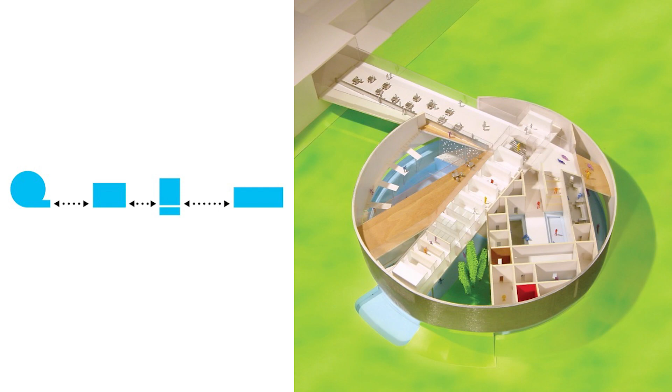It was a public bath, and it was unexpected. When the clients came to the office, there was only Bjarke and Julien De Smedt, so that morning before the meeting he felt he needed to drum up some colleagues to make it sound like we were an office. So they came, and we had 4 people sitting around a desk. Then for some reason Bjarke had to leave, and the client asked the other guy at the table, who needed to go to the restroom, whether he knew where it was, and he didn't, because he'd never worked in the office. So they found out, but they were gracious, and in the end the project died. But we have a good relationship with this client to this day.

The first real project that was built was the Maritime Youth House, which came from a competition.

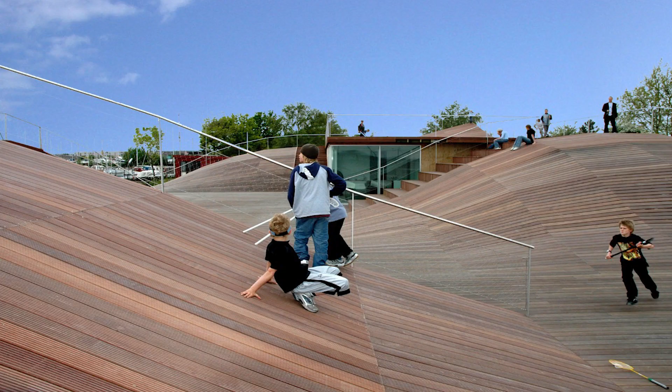They gave us a project with a budget, and essentially a third of the budget was to remediate the soil. We felt that once we start to use that money to dig out soil and put back better soil, we'd sit down with engineers and come up with a solution. So rather than digging it out, we kept it and put over the entire soil that top layer of wooden structure with steel. Therefore we were able to provide the public a space for them to use, and the building still had enough money for us to actually build it.

It's still to this day used quite heavily by young people of all ages, and with it there is a canoe storage facility attached.

Soon after, we got invited to do another project in the Copenhagen harbor. We extended the park, which is on the bottom, and introduced a series of public baths of different scales and functions, creating a public space over the harbor where up until that day nothing was there.

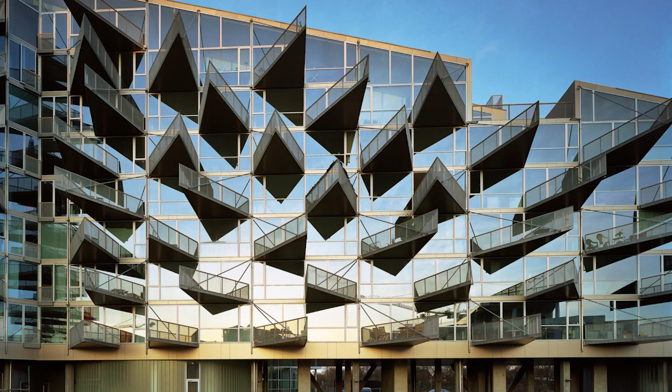That brings me to the housing projects BIG is working and worked on over time. In Europe it's very common that young architects, when they get out, start with housing projects, and it's not different with BIG. The first few years, as a matter of fact, we built houses and apartments.

The first one is the VM house, which consists of two buildings. The black one on this side is version 2.0 of Corbu's project he did in Marseille, Unité d'habitation, where he had planned entire very narrow flats around a corridor.

Which would not have any daylight or views out. What we were trying to do is come up with a similar approach where you have a double-loaded corridor, but rather than making it straight like Corbu did, we made it zigzag, so you could have views out and get daylight in, and the corridors became almost like a social space for all the people living there.

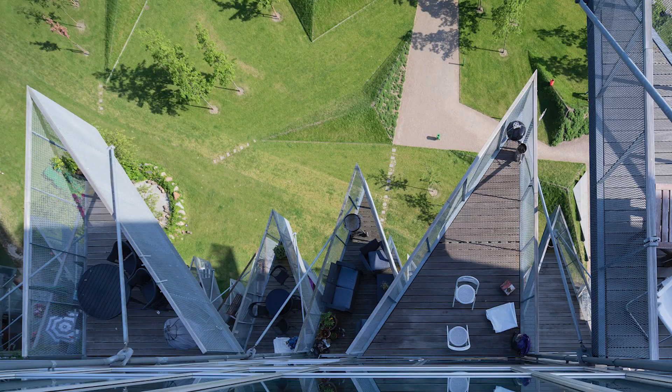So, for the same client in Copenhagen, right next to the VM house, we built a project called the Mountain. Pretty much the same size as the VM house, but this time he tasked us to include two-thirds of the volume as a parking structure. The other ones you would only have access to with bicycles.

Now he came back and said, I got you something here, but you need to put me parking because people, for whatever reason, asked to have cars. Then he came up with a concept where he said, build me a parking and build me the houses, and together that would create somehow this development. We very quickly felt that it was not the right approach.

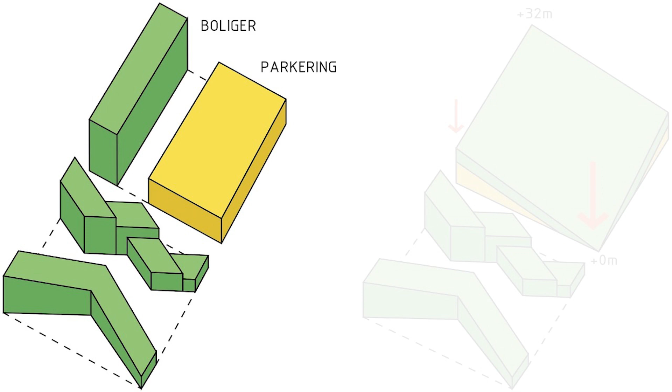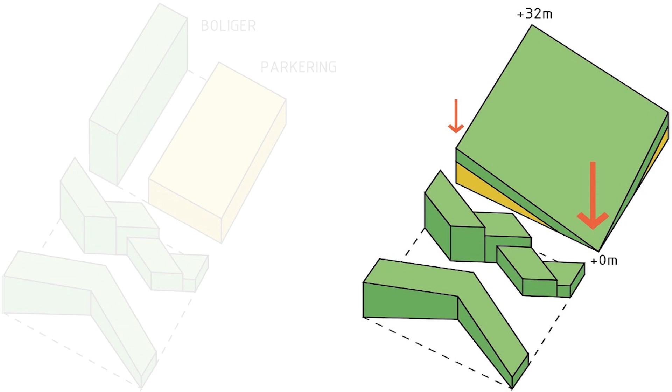The site just felt like we would put a back to the whole development. So we proposed to create the parking structure at the bottom, and then build his apartments on top of it. And so we went—it's a nine-story building.

People can drive up, park their cars, and then walk into the single-loaded corridors from the parking. But they can also, if they come like most people actually in Denmark by bicycle, jump into a cable car that brings them up, and then connect back into your flats.

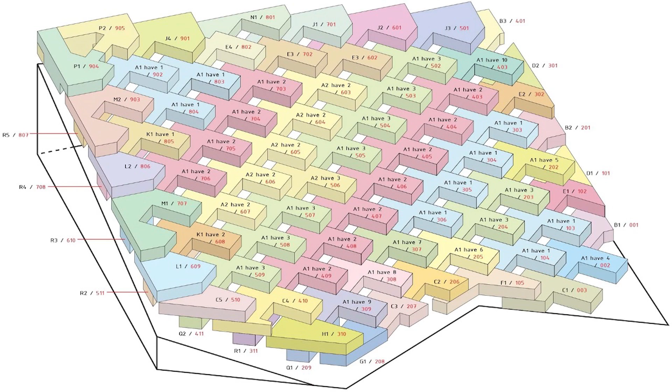The typology which we created was essentially we built houses on top of a parking structure that almost started to take on the same feeling as you have here, where you have single family homes with green space. In our case, we were able to create that same experience, but on that parking structure. So the density is very urban, but the feeling is suburban. We finished this in 2007. Again, the budget was fairly small, but the people really enjoyed it.

From there, we were asked by a group of people whether we can do something which we didn't do till that day. They came and asked us to do a mixed-use development at the edge of Copenhagen. Two-thirds of the development was commercial space, and the rest were apartments. We looked at the typologies, and we felt that rather than stacking them parallel to each other, we were interested in seeing what happens if we layer them on top of each other, which meant that the residential portion got light, air and views, and on the commercial side, at street level, you got the movement, the almost 24/7 type walking around, really anchoring the project to the ground like this.

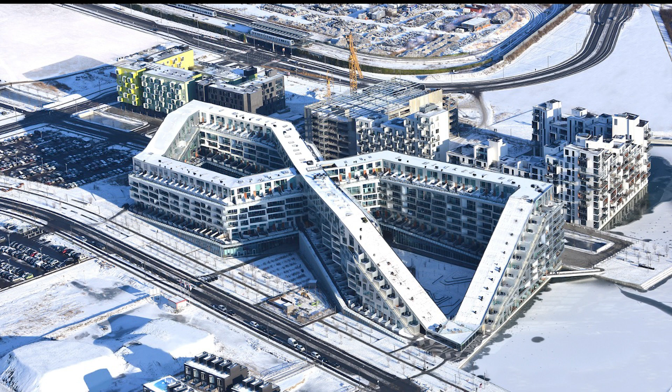It's quite nice. So when you're there, even today, people start, when you go for a run, you see people running up and down. Denmark is very flat, and when you do serious training, you sometimes need hills, and here we produced a hill for the public to use on their journey. That's a view from the lake that freezes and becomes a skating park.

And then in 2010, the office moved to New York. We got a commission from the Durst organization. They asked us to build a high-rise building. They met the first time in Copenhagen when Douglas Durst gave a lecture about real estate. Bjarke went to see it and asked tough questions, why his buildings look so ugly, and whether he could do something about it.

And then in 2010, we had an exhibition in New York. We exhibited all our built models, all Lego models, and Bjarke felt it was a good time to give back. So he invited Douglas Durst to the opening, and like everything was Lego models standing around, and suddenly this real estate mogul came in, and he actually enjoyed the exhibition, and then he asked Bjarke whether he could come to his office the next day to talk about business.

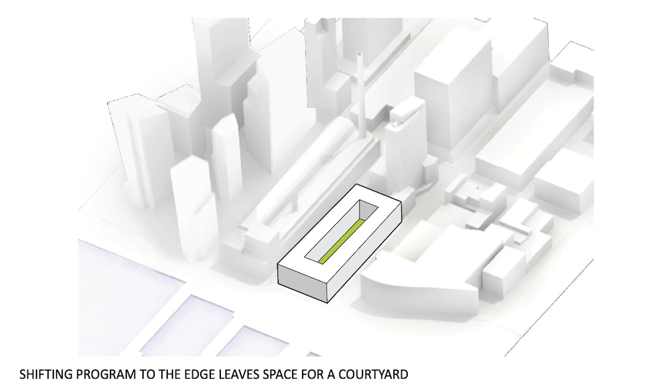And so there we went, a long weekend, and we came up pretty much with that design. The reason for the geometry is not because we like to create another pyramid in New York. It was really the forces of the different things that happened around our site.

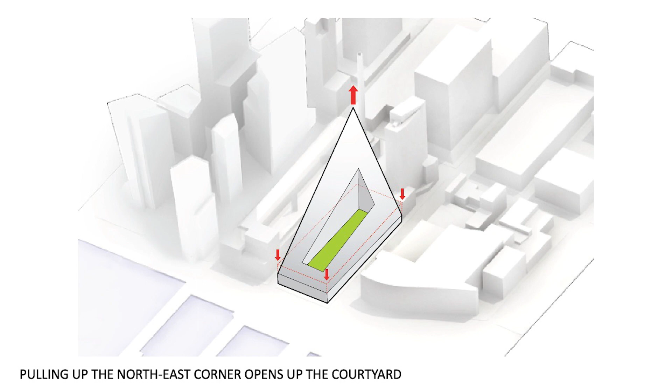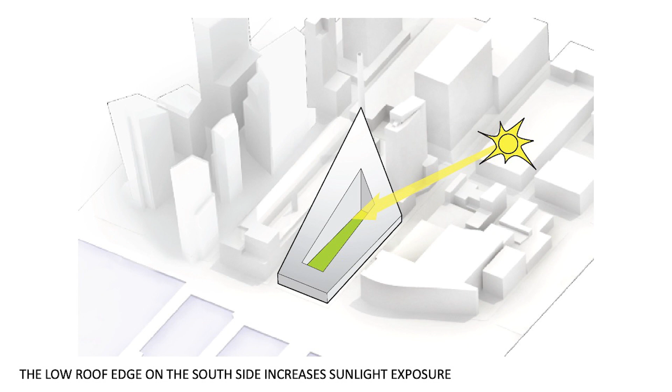Douglas owned this building, so one of his requirements was we were not allowed to block views onto the Hudson River—that was a no-go. He also wanted to somehow create a mass that didn't need two lobbies. So we came up with a concept of a perimeter block, and then pulled it up because we had the square footage available to build the size project.

We also wanted to create views, and since we're working for a developer, you always have to think of how you can provide them with something that gets their money back to them. So we created a series of what we call cockpits, which are essentially almost like penthouses.

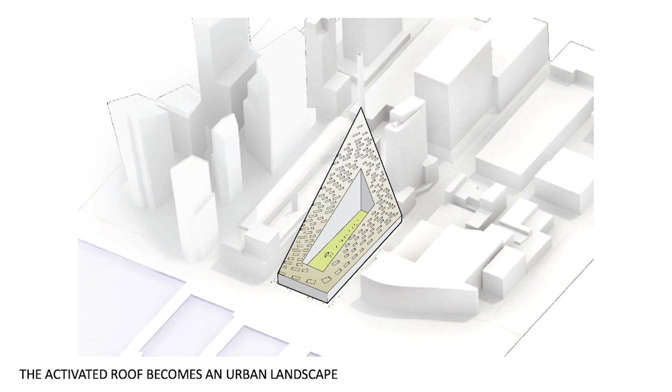Under that roof wall—it's not really a roof, it's not really a wall, so it was really hard to describe. In the building code, once you have a certain slope, it's not a roof, it becomes a wall. So that's what we did.

We had to go through a rezoning application in New York. We started in 2012. The lot was M zoning, and C, which is commercial. It had an FAR of 5.0, and we asked the city to allow us to add a third or more to the FAR, which meant we also switched from M to C.

The lot, as you can see, is highly complicated. It's not just one lot, it's multiple lots, so you had to deal with setbacks and rules, which we did.

Because we went through rezoning, we didn't have to follow the zoning envelope discussions you typically have in New York City. We were able to avoid setbacks at 85 feet and so on, like you typically would if you go for an as-of-right building.

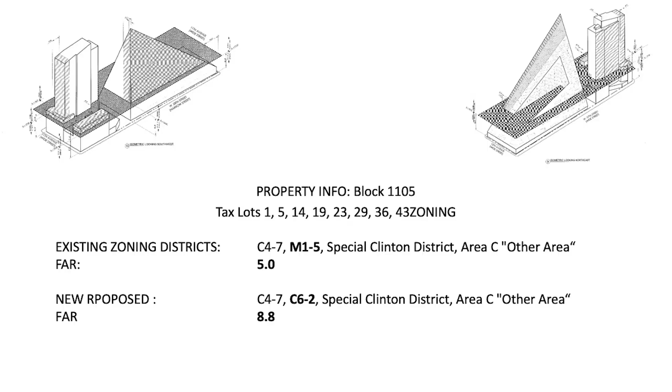And so in the spring of 2013, it was approved. We pulled the permit and we started construction in March of 2013.

When you do residential, ADA has to conform up to your front door. Once you get into your apartment, then it falls under the Fair Housing Act.

When we started the project, the DOJ, which runs the ADA and the FHA, sued pretty much every developer in New York City for not meeting the guidelines. So when we stepped off the plane in New York, we knew that this was a thing, and we really had to follow it.

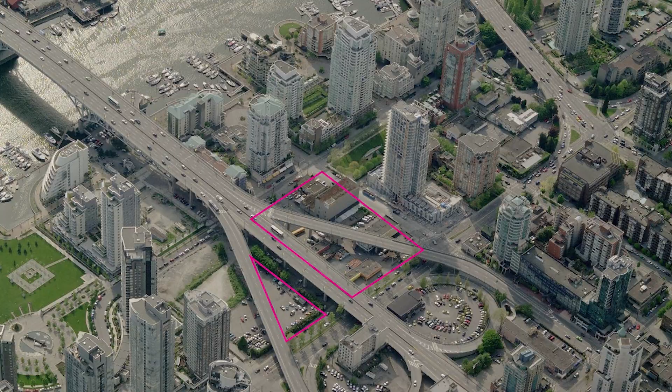The site was extremely challenging. When you come across from the west side, you come across the highway, and that's how you enter downtown. It had a series of off ramps and on ramps, and the site was really a triangular space, with setbacks requiring 100 feet from the street. Apparently the client tried for many years to build something and could never figure out how it would meet his budget - so those were some of the setbacks we had.

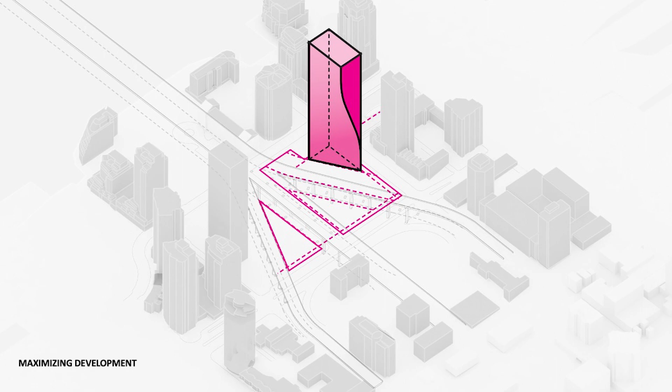So that's what you could build, right? We told him, maybe we could make a plea to the city that if we have the 100 feet and start to play with it, at some point you could get back to your ideal footprint and fit more apartments than you initially had in mind - and that's what we achieved.

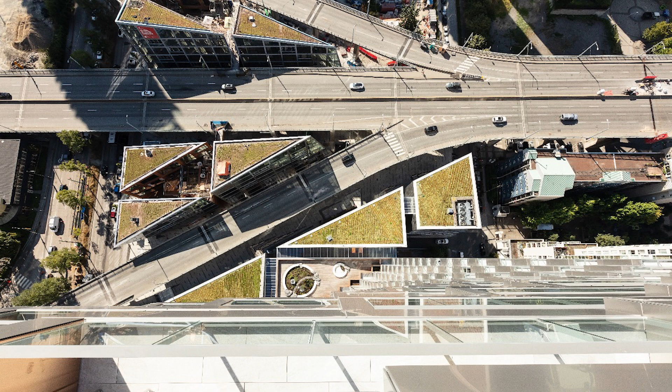The project is a mixed use on the bottom. Between those off-ramps, we have all commercial spaces.

It was fun to do all the curtain wall detailing, which the team was struggling with, and then one day a couple of us jumped at it and we knocked it out in a couple of months.

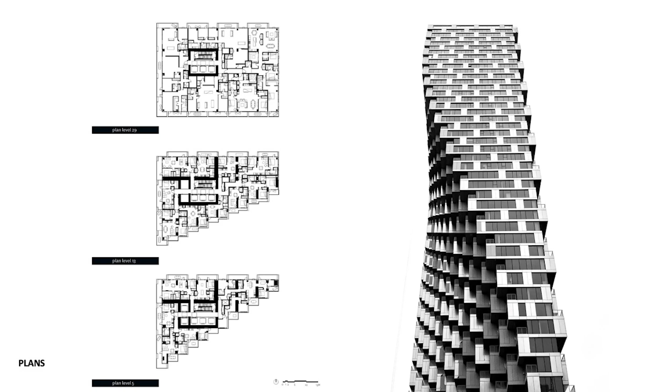It's quite nice. The neighborhood was really kind of dilapidated, there was a lot of crime there, but we also felt that it was not right to just go and do whatever everybody else is doing. And then as you come across, it almost looks like a curtain that's pulled back, so it really creates a nice entry into downtown.

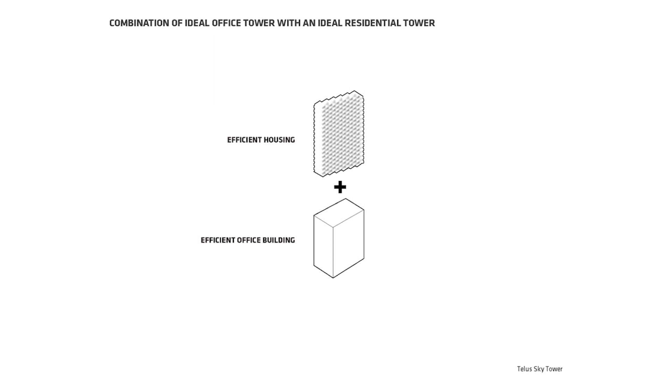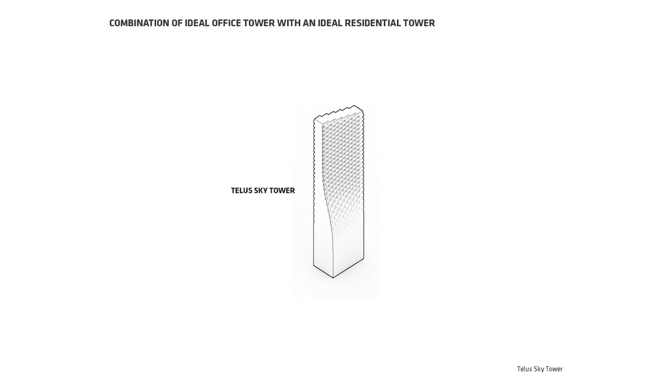Same client in Vancouver had a site in Calgary. He had a partnership with Telus, which is a cell phone company, but they didn't need a lot. They only needed the office space at the bottom, and on top we planned some efficient housing layouts. So those two were the program. We stacked them on top, and then we created some outdoor spaces.

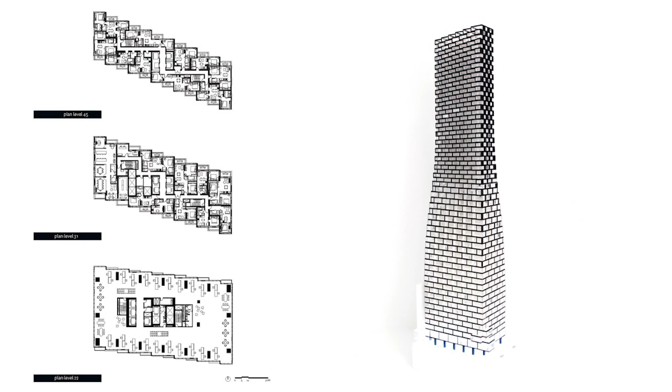We did feel, though, Calgary is really cold, and if New York is cold and hot, this is super cold. I'm not sure whether they use the balconies as much, but I think it's always nice to have the option if someone wants an outdoor space, even if it's only visually accessible.

The material is painted. We fought very hard. You lose battles in our profession, and you move on and say we'll try different next time. But it's quite nice and elegant from the street up, and then the balconies.

In Harlem, back in New York, we got invited to do a residential project that would have 25% low-income housing, for really low income. The client here too came to us and said, I looked at this site.

The architect he had sketches from didn't manage to get him a lot of apartments, units. And because of New York City, that's an as-of-right building.

You have these setback rules at 85-foot street level. You need to set back, and then you can have a dormer condition, which lets you come out for 1/3 of the length of the project. But what it does, because it then pushes the rest of the facade back 10 feet, is create really weird double-loaded corridor conditions, and you lose a lot of space.

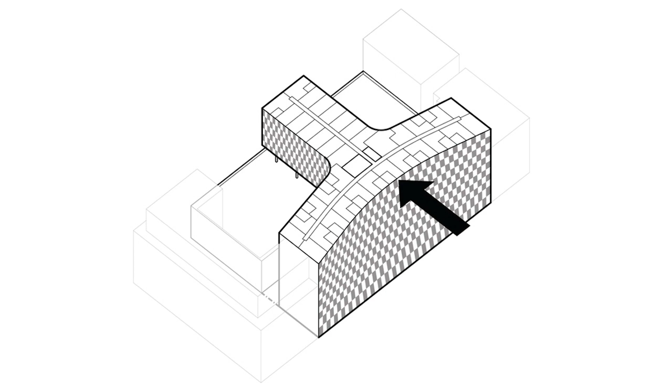The material on the exterior is black stainless steel. It's a product from Germany, called Pole, which we were very interested in. It had the qualities of almost an elephant skin, which very often with stainless steel you don't really get. But here, when you're close up, it's really quite beautiful, and zero maintenance. We were told there would be no change at all.

Because it was in Harlem, there is obviously a long tradition in Spanish Harlem, so we also wanted to bring color into the project. So we came up with the idea of introducing this pattern of tiles that somehow speaks to the tradition and history of Spanish Harlem.

Typically residential buildings are built with cast-in-place concrete, because when you have cast-in-place concrete, it's fire-rated and you don't need extra layers. Every additional layer you add is cost. That's why when you see high-rise residential buildings, they're mostly concrete.

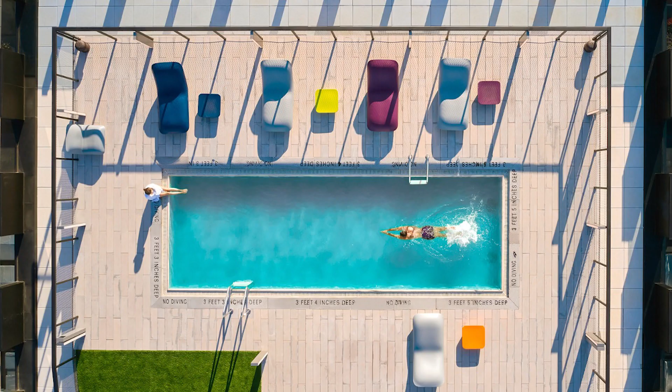It had a sauna and a roof pool, which the client really wanted to have, and I think it's being used quite heavily by all the tenants.

And then in Amsterdam, Bjarke, having spent part of his life in Holland, always feels like Amsterdam is the coolest city with Herman Hertzberger and all the old masters, Van Eyck, and you name them. So he was really intrigued when someone came and said we want to build a project in Amsterdam, but it's going to be over the water, and there certainly will be some challenges. Holland, half of Holland is anyway below sea level, so we felt like we can do it.

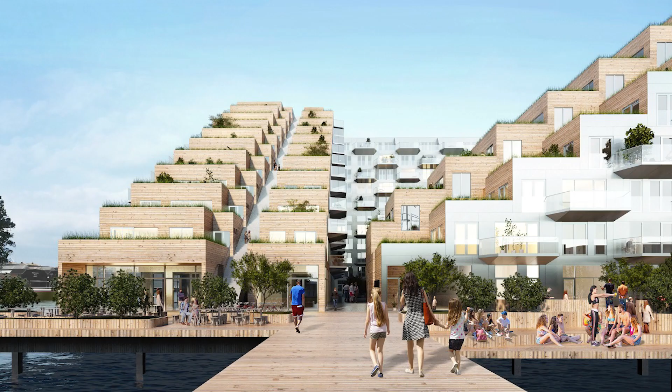And we came up with that concept here where it is built over the water. As you walk from the city, you can walk up into your apartments, so there are walkways up. And since it's on the water side, there's also a harbor, so if you have a boat, you can drive into the courtyard, get off your boat, and actually enter the building.

It's just finished a year ago, and it's quite nice. Besides the structure and building over the water, everything is fairly modest.

Like any other city in the world, or in the Western world, student housing is sparse and unaffordable. So we talked to the city in Copenhagen and asked them whether they would be willing to give us not land, but water, so we could build a couple of student housings for them.

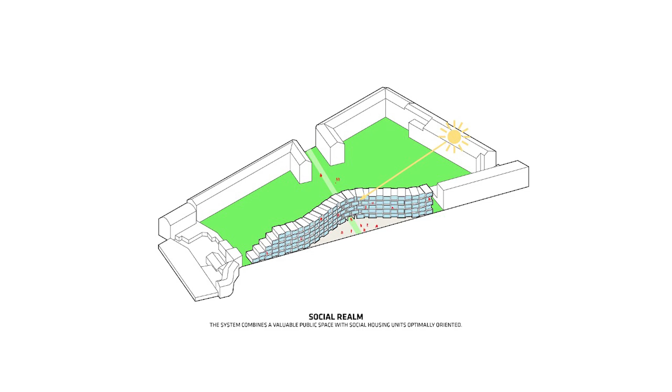And then we also pushed some of the layouts. We started to push and pull, creating plazas in front of the apartments, which would create smaller, intimate gathering spaces for the community. It turned out people really love it.

I visited it last year when we had our partner meeting in Copenhagen, and it really is quite beautiful. It's really cheap material, nothing fancy, everything is raw, good, so it would last.

All prefabricated. You see planks, we have steel, and then concrete planks filled in, partitions, and really the basic, and it creates a home for people.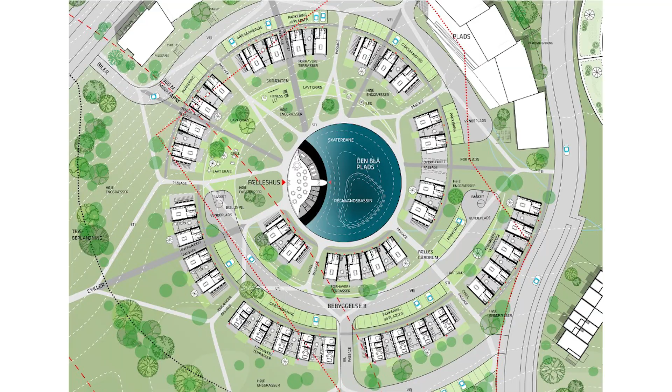For the same client in Aarhus, we looked at the perimeter block, but then we twisted it to allow the green space and the open space to actually flow into the heart of the building. And in the heart of the building, we proposed with our landscape team in Copenhagen to get little gardens, little places to rest and really enjoy that development.

That too, same concept, we used the same technique. It was really meant, and we always intended this to be used, modified and manipulated, so that it creates different environments, even though it's kind of the same.

The inside plywood, wood floor, really modest construction, and again with the planks, precast planks.

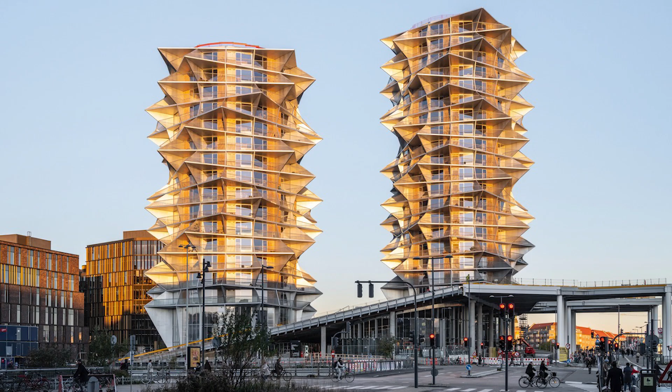And then we came up with this notion and narrative that we wanted to create a system we could start to use, because at the end of the day, when you come up with a system that you can place, you can cut out cost. But it's actually not just that, and that's maybe what was the intriguing part of the cactus towers, we call them.

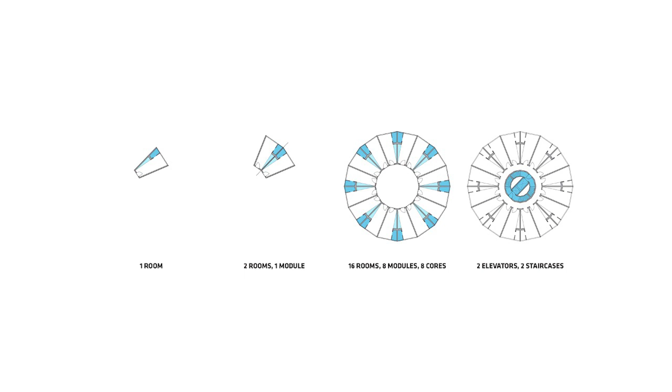Okay, so we came up with these units that you stack - bathroom stack, kitchen stack, everything stacks - and in the center you have the core, your egress, your elevators. Then what we did was simply rotate the slabs, but the units themselves, they stack.

That allowed us to have this crazy exterior of guardrails and handrails, which people use for all types of dangerous things. But on the inside, it's really nothing special. So that's where I think it certainly interests us, and when we talk about cost savings, those are the moments where if you come up with something that really can drive down costs, is something we should all aim for.

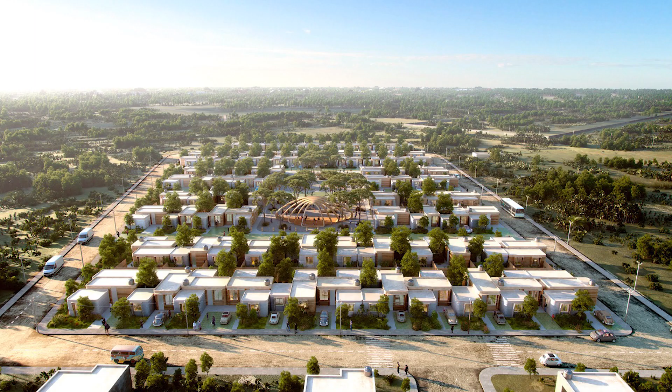In Texas and Mexico, we started to work on a typology where we are looking at 3D printing, and that really came out of us working for NASA in Houston. We met them a few years back, and they said they were in the process of printing on Mars and the Moon, and we thought, oh cool, it sounds like something we could help them with. So it became a dialogue, and last year in December we opened a Mars habitat in Houston inside a hangar.

Where we printed a structure for 4 people to go in there and live for a year. I'm not sure whether I would have gone, but they went. So I'm curious how they feel about it when they come out around Christmas.

But the intention, we use the technology, and over the last 3 to 4 years we tried to come up with ways to use it, and what it means. So we started to look at printing houses. There are limitations as we speak, but the last few years they definitely made advancements. Still, the height is one of the issues because it's essentially a nozzle that prints concrete sausages, and the height restriction is 12 feet. The roofs we either use wood or we also printed some of them.

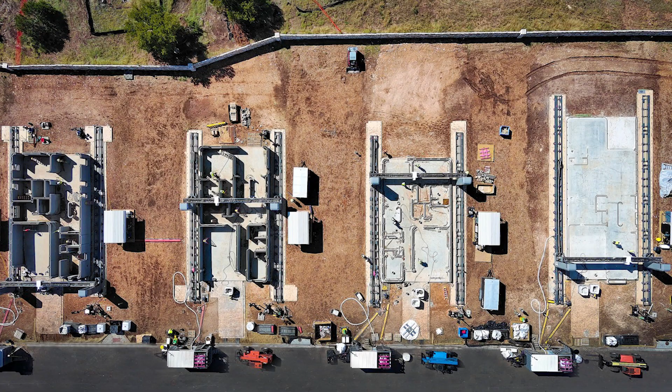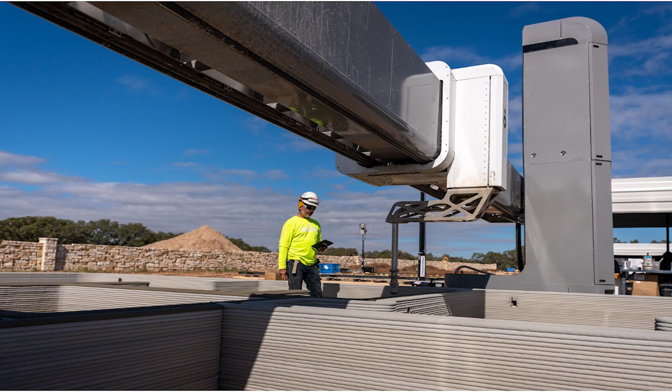Yeah, so that is in Texas actually. And this is essentially what they're doing, and I think what's good about it - and we're skeptical - but what's really good is because you don't have any waste. A lot of time when you build houses, you look at your raw material you're using, and then what's left is your waste, and here you really have none. It's all printed, and that's it.

And the insulation, because it has cavities, they can print inside, outside, and in certain parts of the world this is pretty good because it really blocks out the heat. Those are the interior - it looks nothing special, but it's just the technology, and playing with technology and really seeing what's possible is quite what interests us.

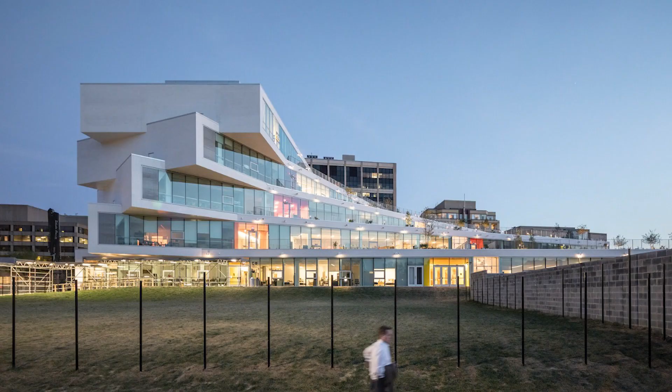And maybe now leaving the housing, going back to the 3 projects I worked on. One is we built this public school in Arlington. It was a competition, we won it. It started before the pandemic, and it pretty much ended, or they moved in right when the pandemic hit.

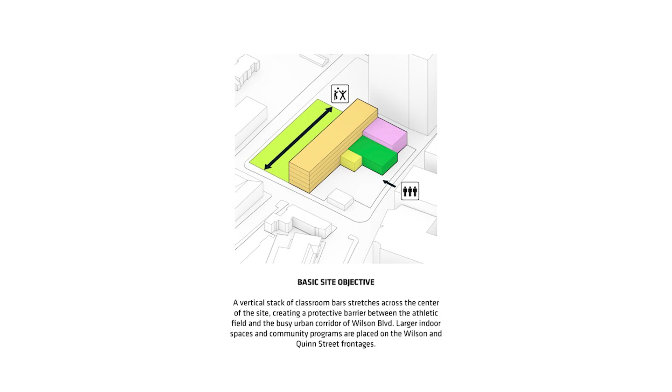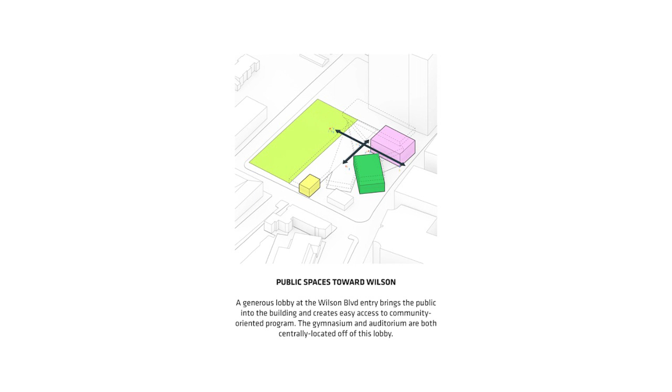But what we tried to do was, they came with the program - they wanted classrooms, admin, sports, and circulation, and they had a sports field which they really wanted. So we came up with the idea of creating this fanning out geometry where every classroom would have outdoor space.

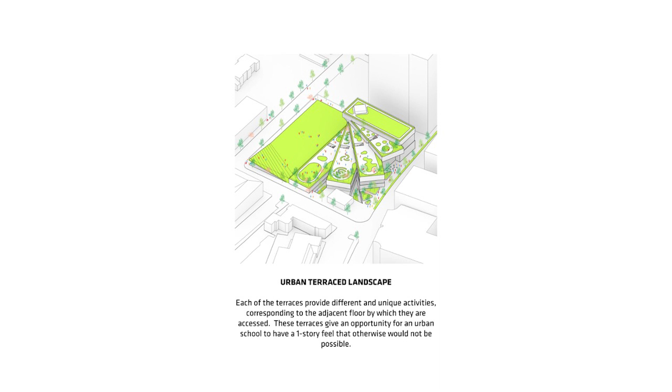And so when the pandemic hit, that was really useful, because even though they wouldn't go there every day, they would go once in a while and use the building just like we imagined, with kids being out there playing and using the building.

That was quite nice. I went back this year, and someone today asked me what's my favorite project I worked on, and I must say it's definitely this public school. It was such a delight to see the kids using the building, starting to draw everything onto the walls, and they were so happy. I've never seen that.

Also, when we planned the building, we said because now you have all these spanning devices, people would not know where they were. So we said, what about if we use a different color on each level? And everyone hated it. All the teachers said this is a bad idea, they were not for it, and the maintenance people freaked out, because if they needed to repaint this, it would take forever. So we pushed them really, really hard.

At the end, because it is a public school, somehow the architects, besides maybe working for a developer, still could have an influence, and they went for it. The first thing they told me when we went there this January was they were all in love with it. It was such a good idea, and it really served the intent of having that recognizable when you walked up. They have special needs kids in that public school as well, and for them especially, it was so good to have.

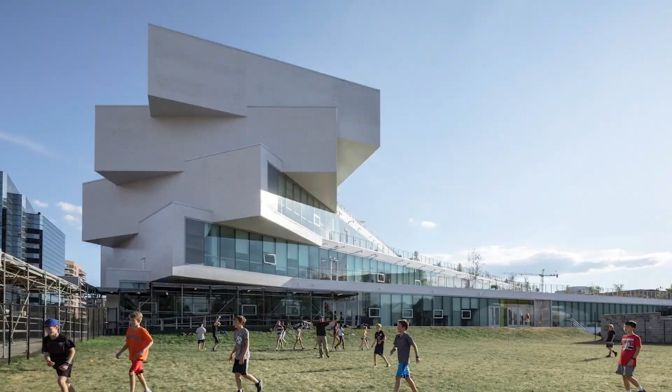We were also asked by the university, UMass in Massachusetts, to add an extension to a business school. They needed classrooms, they needed a place for students to hang out, they needed a gathering space, and they needed offices for the dean, who was tired of being in the building over there. So we said we can help.

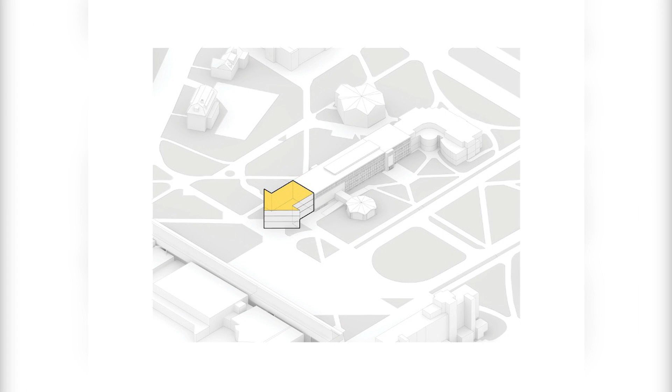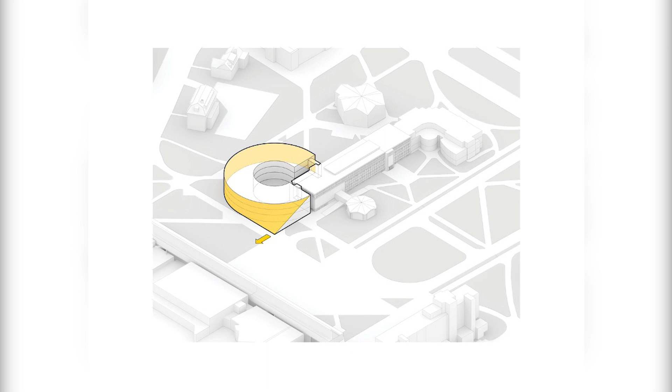It was a competition we won with Goody Clancy, our local architect. So what we did, we extended the existing structure, wrapped it around, created a courtyard right here, and then stretched it over to have an enclosed courtyard, because in the spring it's quite cold up in Massachusetts, and in the fall it's kind of muggy and hot. So that's the concept we presented, and it got built.

We were there as well, and they actually told us it was such a success that they now have more students signing up for the class, and they wished they would have made more classrooms, and larger ones, because now they have more students attending the classes there.

That brings me to the last project, which I feel speaks a lot about what BIG is about, what we do. We won this competition for a waste-to-energy power plant. Very often, those types of facilities are in the outskirts of cities, wrapped up, nothing fancy about them. It's a machine, it has to function, work as intended.

When we entered the competition, we said let's make something, let's provide them with a gift they didn't think of when they announced the competition. So we came up with this idea of creating a ski slope on top of the power plant, where one could take the elevator up, ski down, and if you want to stay on the steeper hill, take the lift back up and go down, or you can go all the way down and then back up.